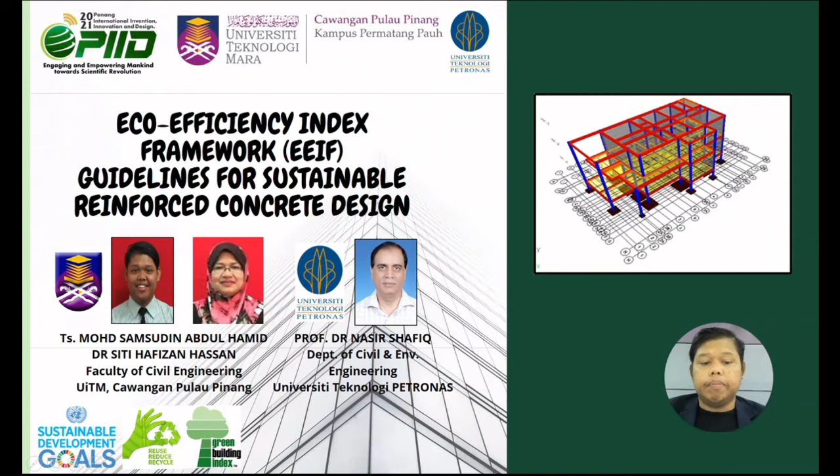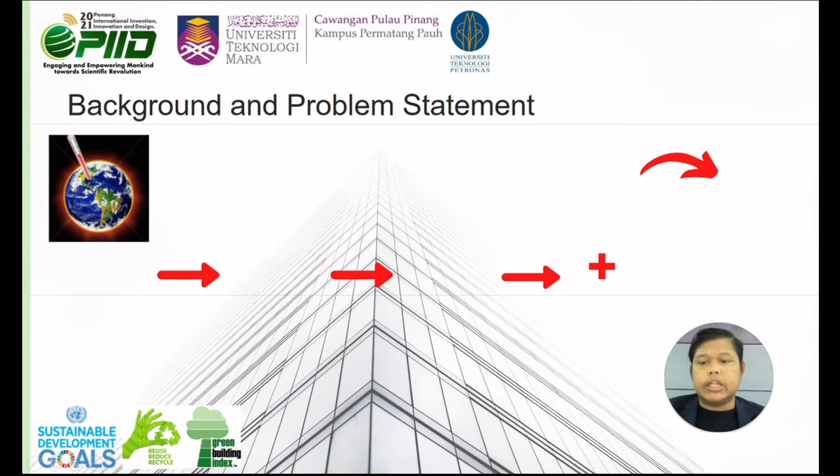As the background and problem statement, when I was 5 years old in the 1990s, the average temperature in Malaysia was only 25 degrees Celsius, but it is reported in February 2021, the average temperature has become 36 degrees Celsius. What caused this problem? Unplanned development and economic activities may cause increasing CO2 emission and CO2 concentration in our atmosphere.

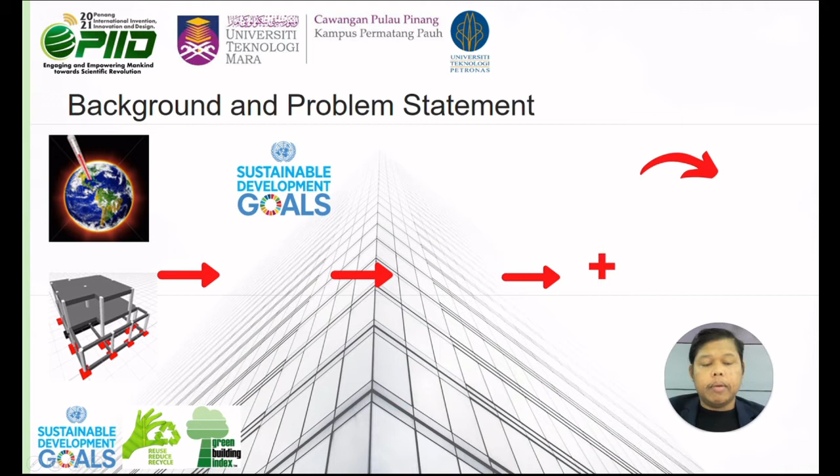Therefore, the United Nations Development Program came up with a brilliant idea by introducing the sustainable development concept, integrating economic, social and environmental balancing.

Recycling is also one idea to promote sustainability, but we have to be careful whether this recycling concept will give a benefit to our environment or not. In Malaysia, the Green Building Index has been introduced by Green Building Index Sendirian Berhad to promote sustainability, where we can classify the building we design into different levels of green. Therefore, in Malaysia itself, many researchers have come up with the idea of using recycled material as a replacement material in concrete.

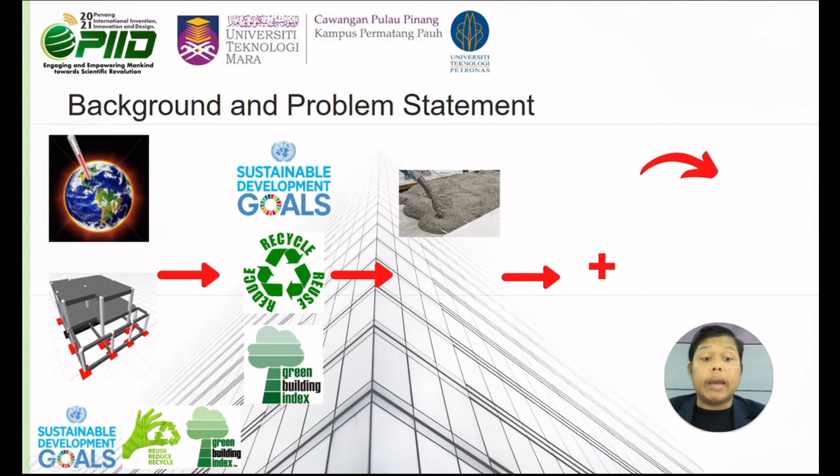Some ideas come out to replace ordinary Portland cement, which is produced from natural resources, specifically limestone. One idea is using fly ash and also blast furnace slag. This fly ash comes from coal electric power plants, and blast furnace slag comes from steel production. Then we have to examine this material to see whether it benefits the environment or not.

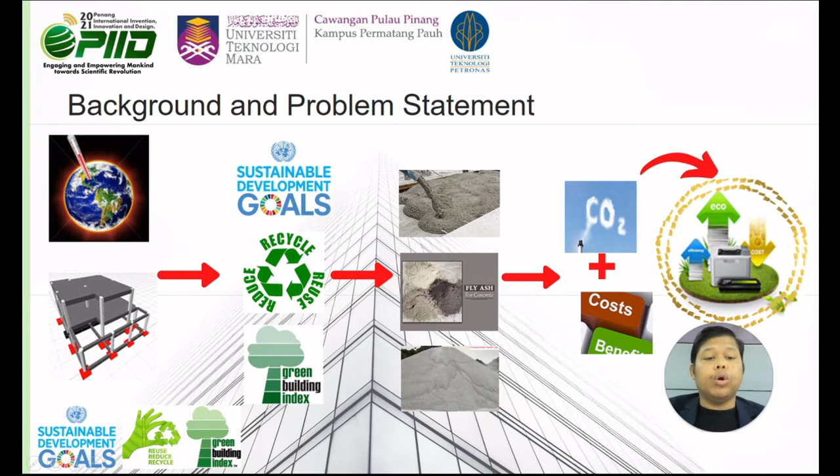Therefore, I came out with my study by integrating the sustainable development criteria, which is the emission of carbon, and also analyzing the cost of the material used in reinforced concrete structure, to examine the eco-efficiency index of the building. Here is the objective of this study.

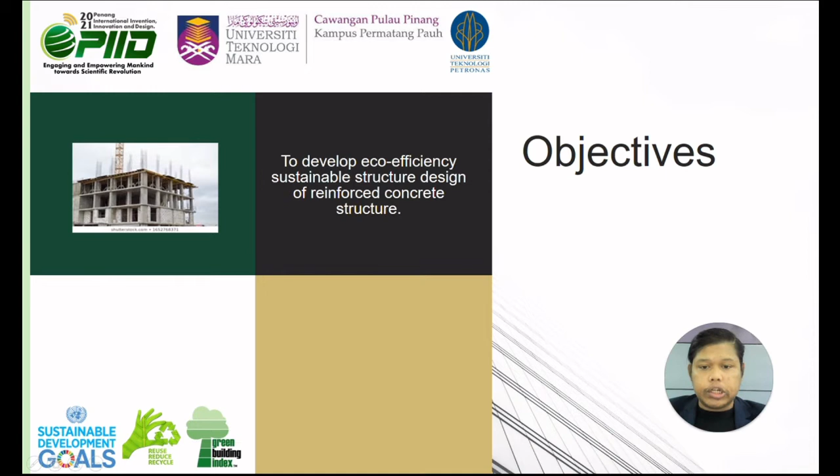The first objective is to develop the eco-efficiency sustainable structure design of reinforced concrete structure, and the second is to develop the Eco-Efficiency Index Framework (EEIF) guideline of reinforced concrete structure for promoting sustainable structure design.

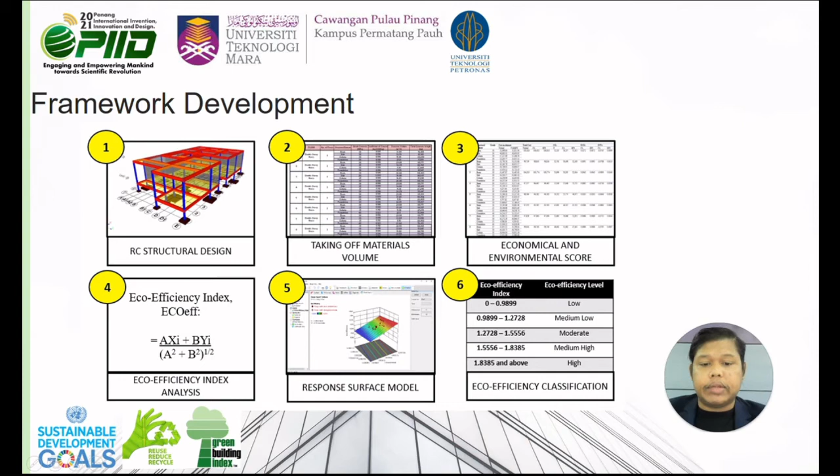Here is the process to develop the framework: reinforced concrete structural design, taking material volume of concrete and steel, calculation of economical and environmental score, eco-efficiency index analysis, response surface model to come up with a prediction model, and finally classifying the eco-efficiency classification of the building or structure designed.

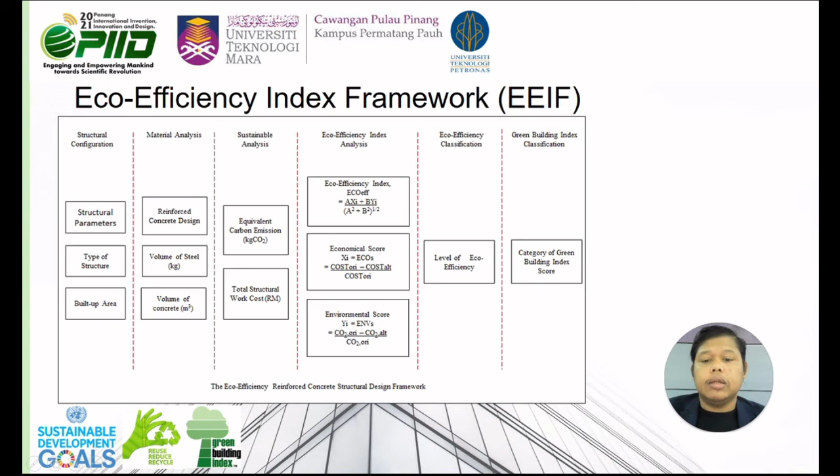Here is the Eco-Efficiency Index Framework that we can use to design sustainable reinforced concrete structures. This framework involves structural configuration, material analysis, sustainable analysis, eco-efficiency index analysis, eco-efficiency classification, and also Green Building Index classification. We may use this overall process as a guideline to produce reinforced concrete structural design that promotes sustainability.

This is the Eco-Efficiency Index Framework Guideline. This guideline benefits structural designers to produce sustainable reinforced concrete structures that fulfill the needs of the Green Building Index under Criteria 6 on Innovation.

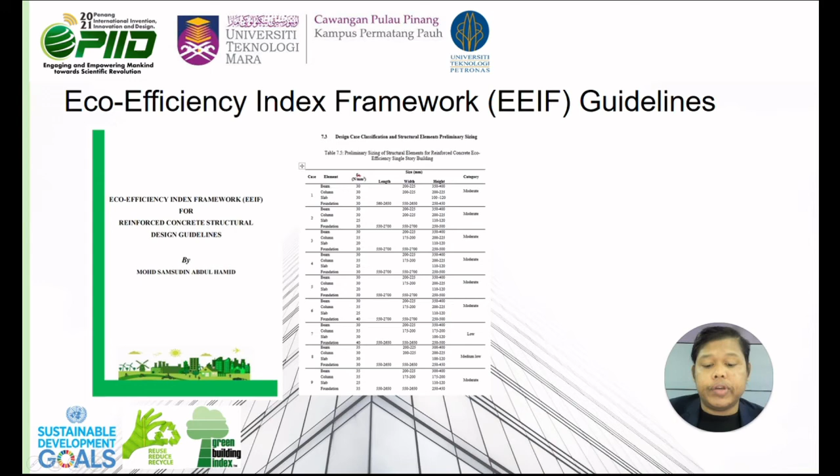It also provides the overall design specification for reinforced concrete structure, including analysis of cost and equivalent carbon emission of reinforced concrete structure. Furthermore, this guideline provides a selection of structural element specifications for different eco-efficiency levels that is important to be used in the design.

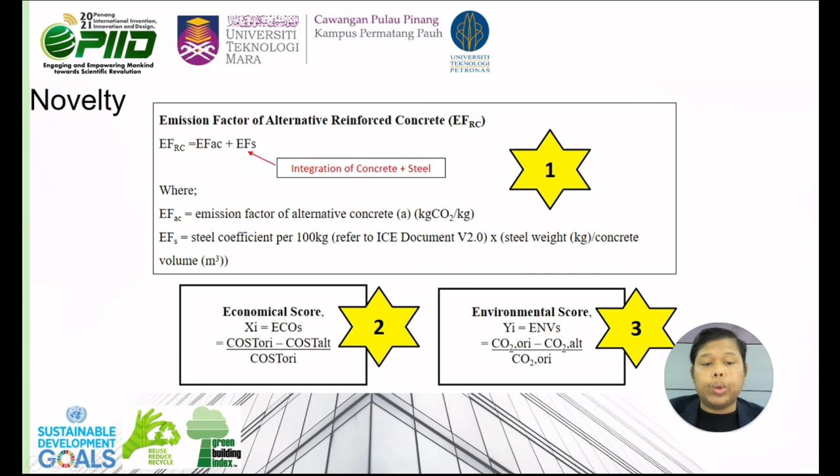Let's have a look at the novelty of this research. There are three novelties. The first is the formulation, which consists of the emission factors of alternative reinforced concrete (EFRC), the economical score, and the environmental score. These three formulations are used to determine the eco-efficiency index of the reinforced concrete structure.

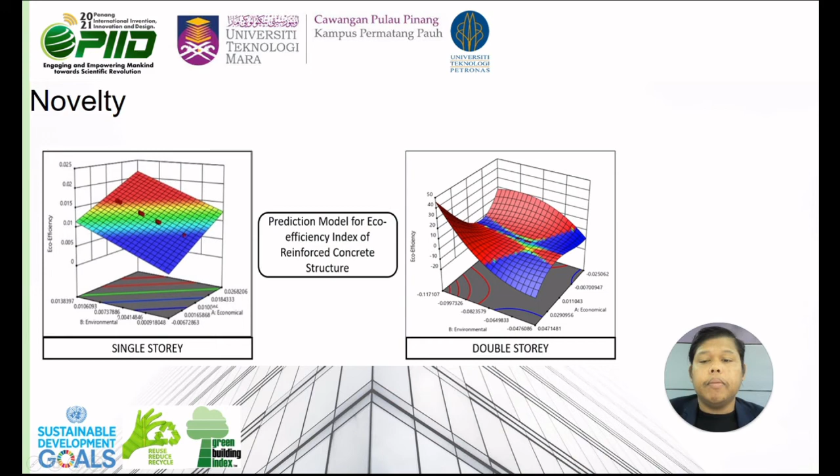The second is the prediction model for the eco-efficiency index of reinforced concrete structure. This prediction model can be used to predict the total amount of CO2 emission of the reinforced concrete structure, and also to estimate the cost meeting the requirement of different eco-efficiency levels. For example, if we would like a moderate level of eco-efficiency, we may know how much CO2 emission and the value of the eco-efficiency index. So this prediction model will help analyze those variables.

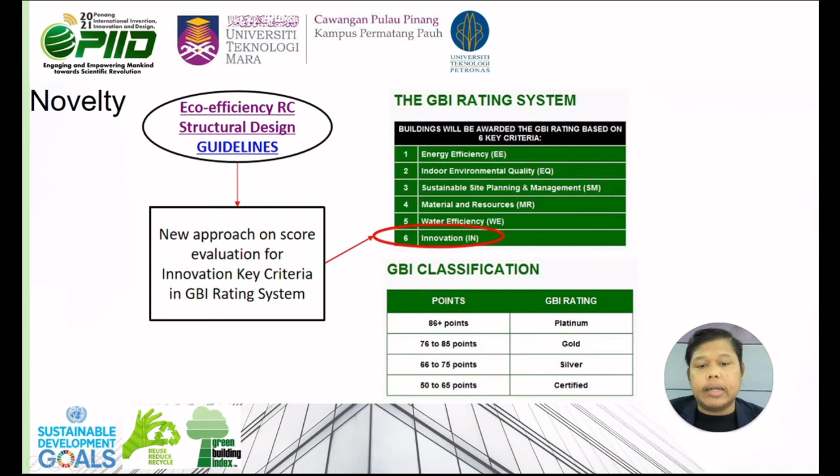Last but not least is the Eco-Efficiency Reinforced Concrete Structural Design Guideline. This guideline is a new approach for score evaluation for the innovation key criteria in the GBI rating system, where we can embed this calculation or analysis in Criteria 6 of the GBI rating system.

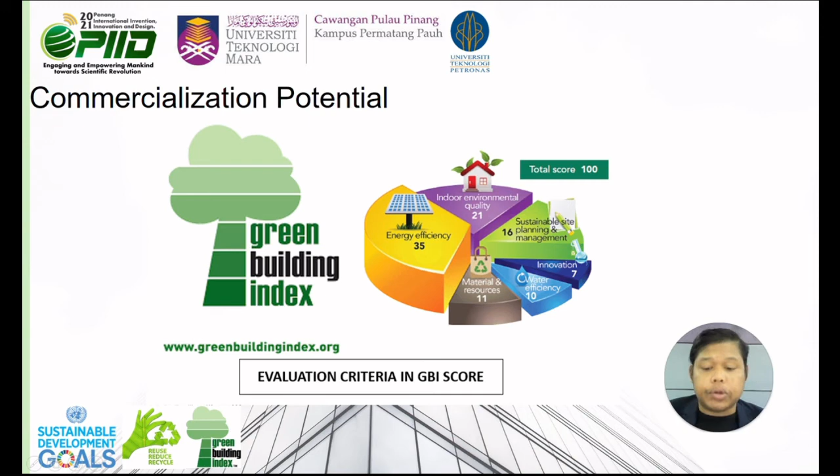As for the potential of commercialization, the Eco-Efficiency Index Framework guideline is potentially being used as a reference among engineers to design alternative reinforced concrete structures for slab, beam, column and foundation that produce low carbon emission by using alternative materials such as fly ash and blast furnace slag to replace natural resources, especially ordinary Portland cement. Here is some of the publication and recognition I received from this research work.

There is a publication in the Journal of Applied Science, indexed under WoS and also Scopus with Q2, and also some Q3 Scopus journals. I also already received the Gold Award during INDEX 2020, organized by UiTM Perak. Besides that, this product is also registered to get the copyright, under the topic of Eco-Efficiency Index Framework for Reinforced Concrete Structural Design Guideline.

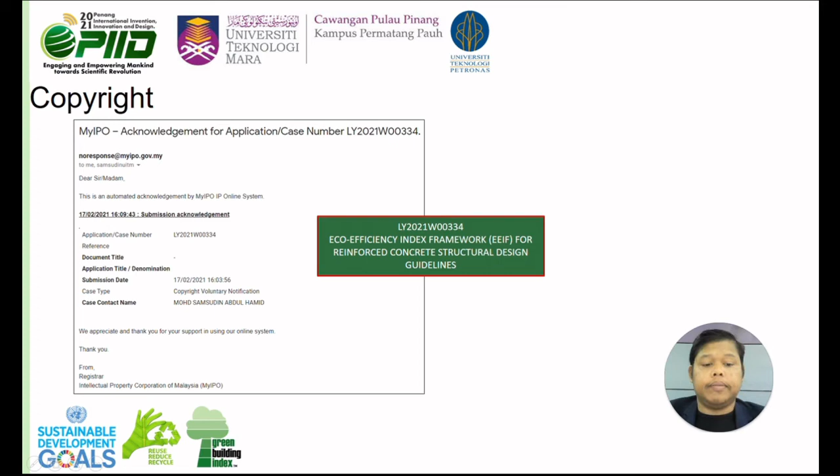During the pandemic years 2020 to 2021, it was recorded by Global Carbon Budget 2020 that there was a reduction of 7% CO2 emission all over the world, equal to 2.4 gigaton CO2 emission. This was recorded as the highest reduction in CO2 emission all over the years since the Second World War.

This already triggered my mind that in order for us to make sure and save the earth, we have to control the development and economic activity that may harm the environment. That's why I came out with this research by using recycled material.

People say that using recycled material is good for the environment, but please don't misconceive the recycling of material in sustainability. When we go into detail in the analysis, not all waste material will benefit the environment—some of it may actually harm the environment.

So please be careful when using waste material in a new approach in concrete technology or any other application. That's it for my presentation. Thank you.